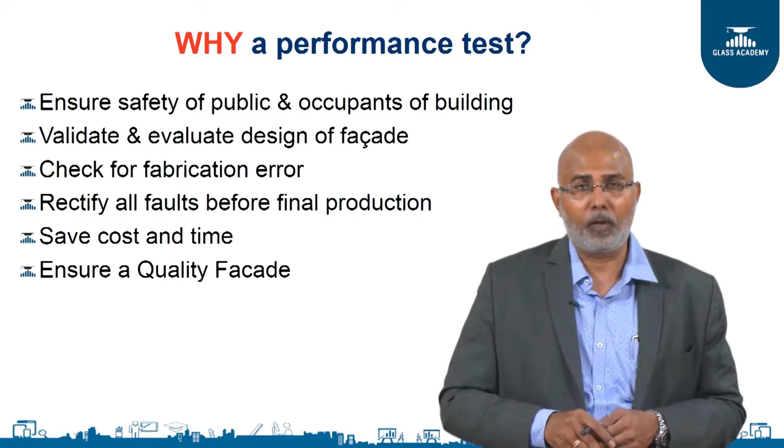By going through all these processes, you save a lot of cost and time. Unnecessarily, you do not have to waste your effort and money on rectifying and repair, because a stitch in time saves nine, and of course, prevention is always better than cure. So, having gone through the tests, made the corrective action and made sure that all the minor errors have been eliminated, you ensure that the product that is finally coming up is a quality facade which everybody is happy about. So, everybody gets value for money.

So, now let us get into the kinds, where do we test and when do we test it? There are two different locations where tests are conducted. One is in the laboratory and one is at the site. The one that is done at the laboratory is before actually any installation starts at the site. So, for the design verification and evaluation, there is a mock-up which is installed at the lab, and then we create atmospheric conditions to understand the behavior of that facade, and based on that make corrective action and retest it and make sure the product is perfect in its design and it delivers what it is supposed to. So, that is done at the laboratory, way before the project actually starts at the site. And the other one is the on-site.

So, once the sample is tested and okay, it is approved, it performs well and it is certified, then everybody signs off and says that you can go ahead and start manufacturing it. So, how do the developer and the architect and the consultant ensure that the same quality that was used for the test is actually being replicated at the site, because it is 1000 times bigger or maybe 500 times bigger than the mock-up sample? So, in order to ensure that the same quality is delivered at the site, there are certain tests which are done at the site on a progressive basis as the project is getting implemented, on a random basis, to ensure that the performance at the site is the same as when it was tested at the lab.

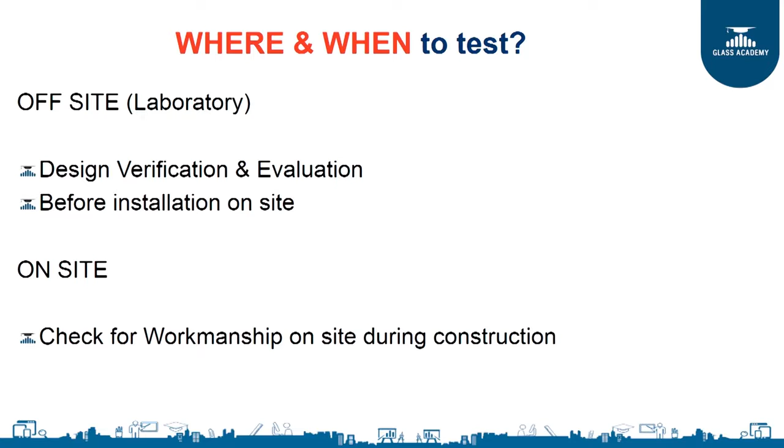Now, what are the tests? Basically, there are three tests. The first one is air leakage, and a facade again is not like a single huge piece of glass. There are 1000 or 5000 glass panels which are coming in a series vertically and horizontally. They are being installed at the site, and there are thousands of joints.

All these joints are getting locked into each other by gaskets. So, obviously you cannot have zero air leakage, but there are certain standards which have been established, and that standard clearly says how much air can leak from that facade. So, we look at different standards for leaking, and then in the mock-up sample we actually try to measure what is the leak through the sample.

So, how do we do that? There is a process and there is a specification for air infiltration and exfiltration. So, the lower the air leakage through the facade, the higher the energy efficiency of that facade is, because considering the fact that we are always having a controlled environment inside the building, we try to maintain a temperature of maybe 22 or 24 degrees, air conditioned or heating up, whichever the case may be, while the outside atmospheric conditions may be much harsher. It can be extremely hot or extremely cold.

So, under these circumstances, if the quantum of air that is leaking through the facade is minimized and kept as low as possible, then the energy efficiency of the building is very high, and you can save a lot of money. Because sometimes we do not realize that we are losing so much energy, because the facade is such a huge area which covers the entire frontage or the sides of the building. There are thousands of joints. So, even a 3% or a 5% leak extra means ₹1,000,000 going down the drain.

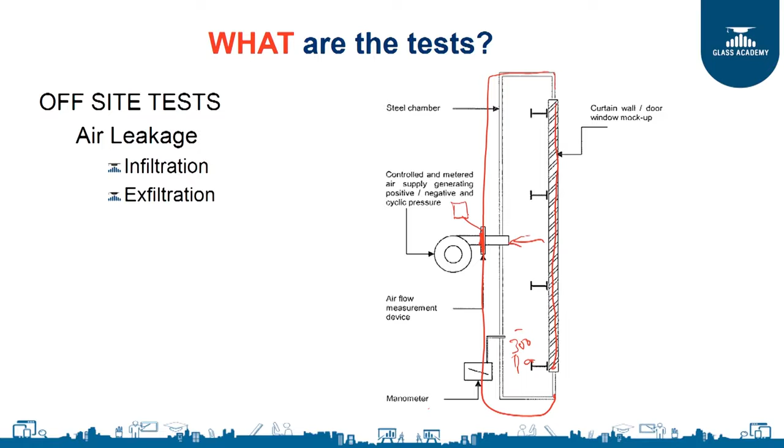And as this air is getting sucked out, we are also measuring the quantum of air which is coming out through an airflow meter. This is the orifice plate over here, and there will be an airflow meter which will actually be measuring the quantum of air that is coming out. So, at a differential pressure of 300 or 500 or whatever is the specification, when we reach that differential pressure, there is a continuous air that is coming out at that constant differential pressure. So, that is the leakage of the chamber, which is a fabricated structure, and the curtain wall or the facade sample which is being mounted over here.

So, now how do we identify how much of this is the chamber and how much of this is the curtain wall? So, what we actually do is we put a plastic sheet before we start the test, and this plastic sheet is an impermeable layer covering the facade. So, when we start sucking the air, this plastic sheet comes and gets stuck to the surface. So, then there is some amount of air which is leaking over here, and this is measured and recorded. That is the actual leak through the chamber.

So, once that is ascertained and recorded, this plastic sheet is removed. Once this plastic sheet is removed, we find that there is an incremental flow of air through this airflow meter. So, the difference between the first reading and the second reading is the actual flow through this facade.

So, there are specifications. For example, ASTM says 0.5 liters per second of air can leak per square meter, which converts itself into 1.8 cubic meters per hour per square meter. So, if you have a facade of 10 square meters, that means 18 cubic meters per hour is allowed as a leakage. And there are of course special allowances, extra allowances given for openables, where the perimeter length of that openable is taken, and then some extra allowable air is provided for as an acceptable tolerance.

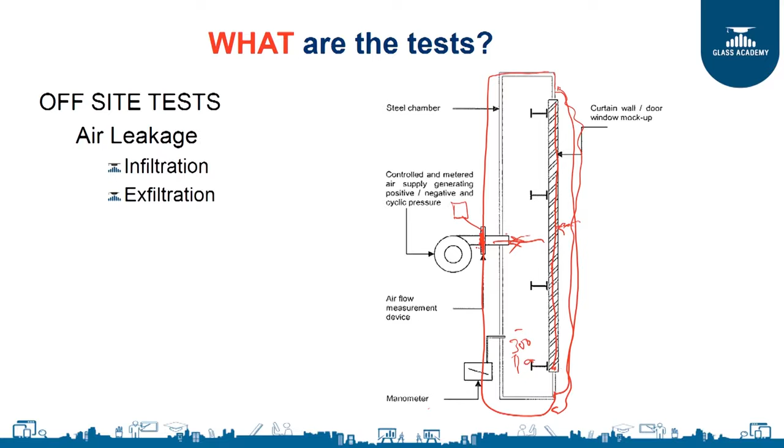The next one is the static water penetration test. Now, one of the things that the facade is supposed to do is to stop the water from coming in when there are extreme cyclonic conditions or a typical monsoon that we are going through.

Now, we have a huge glass facade in the front, and then there are expensive interiors which have been done, and it is either a house or an office. There are false ceilings installed, and then you have a lot of cabling going in these false ceilings, networking cables and electrical cables. So, you cannot afford to have water coming into the building and leaking through that, because there can be a catastrophic accident.

You can have a short circuit, or the false ceiling, being gypsum, will fall down on somebody's head. So, in order to avoid that, we have to ensure that this facade is absolutely watertight, and there is no chance of any water entering into the building.

And if there is water entering through the facade, it is extremely difficult even to identify where the source of the leak is, because generally water tends to go in the path of least resistance. So, it can enter at some level on the 5th floor and come out at the 2nd floor. So, it is very difficult to identify where the water is actually entering into this facade.

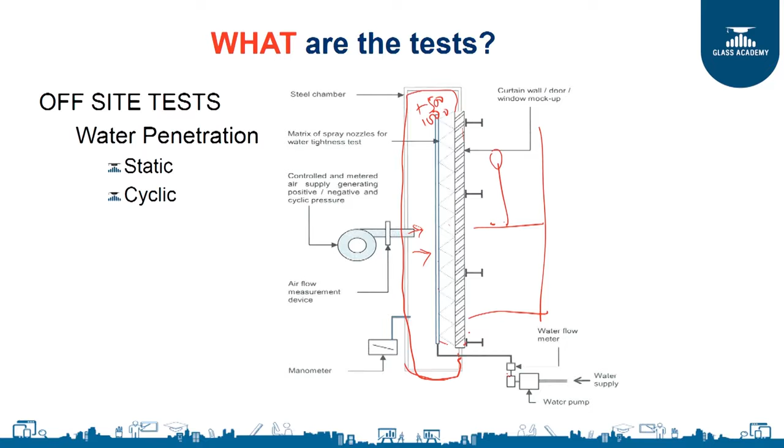So, if the facade passes, that means that in a real life situation it can absolutely not fail, provided the same methodology is followed, the fabrication is done properly and installed properly. The system by itself is very strong, and it will not allow any water to pass through it.

There is the American standard AAMA, where they create a cyclonic pattern. So, in order to create a cyclonic pattern, they add a huge kind of a fan, and for that they recommend a propeller engine, which is one of those older engines we saw used in the Second World War, and these engines are used today widely in all the performance testing labs to create that kind of a cyclonic wind load on the facade.

So, the water is being sprayed from outside, there will be people standing inside and observing at these levels, and you have this propeller engine which is blowing the air, and the water is continuously being sprayed for 15 minutes. The door is open, there is no differential pressure inside, the blower is off, the only pressure is from outside. Normally this is 600 pascals, and for 15 minutes the water is being sprayed and air is being blown. So, here you will have water flowing from downwards into all the other directions.

So, there will be a video which I am attaching immediately after this, which will show how it looks in real life when the test is happening, and you will have a better idea when you see that video. So, this is for a 15-minute period, and after 15 minutes it stops, and there should not be any water leak on the inside.

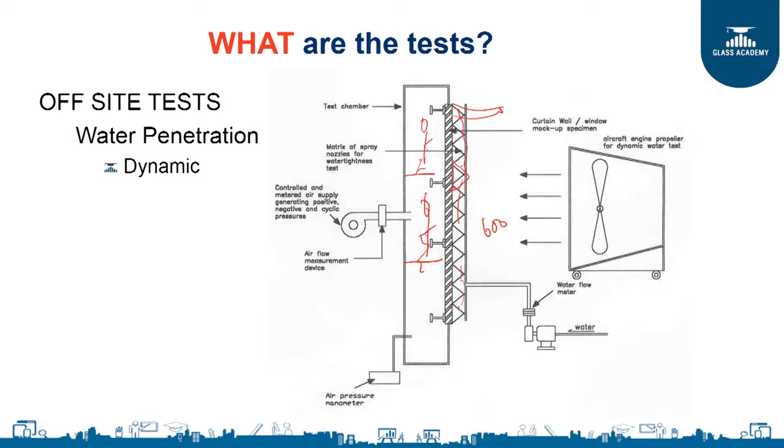The dynamic test also is very ideal for any facade where you have some external features. For example, you will have some pergola made of metal with glass, or sometimes they will use a bullnose aluminum profile to give it a characteristic, some kind of decorative thing sticking on the outside of the building. So, these are all external fixtures, and they want to know whether the hardware being used to hold those things is adequate. So, when you simulate these atmospheric conditions, you can also know whether these are rattling or vibrating, or whether they are able to hold on despite the heavy wind pressure. So, this is the dynamic water penetration test.

So, after that we go to the structural performance test. The structural performance test is to understand and ensure that the structure itself is able to hold, because you have a large panel of glass which gives a lot of resistance to the wind, and when you have a huge facade facing the wind, the impact of the wind on the entire building is pretty heavy, so the stress and the pressure is transferred onto the glass, which in turn is transferred to the aluminum profiles, which are anchored on a floor to floor basis.

So, there are deflections, the entire facade is giving in and coming back, and we need to measure how much it is coming in and out at the given wind load for which it has been designed. There are certain allowable deflections, because aluminum has some flexibility, it can give in and go back to its original position, but beyond a certain pressure it will deform permanently. So, the facade will start becoming concave or convex. That is not good, because structurally it starts to transfer the load into the next profile, there is a sequence of loads getting transferred, and somewhere one of them will give way. So, in order to avoid it, we simulate the wind loads and measure the deflections using transducers.

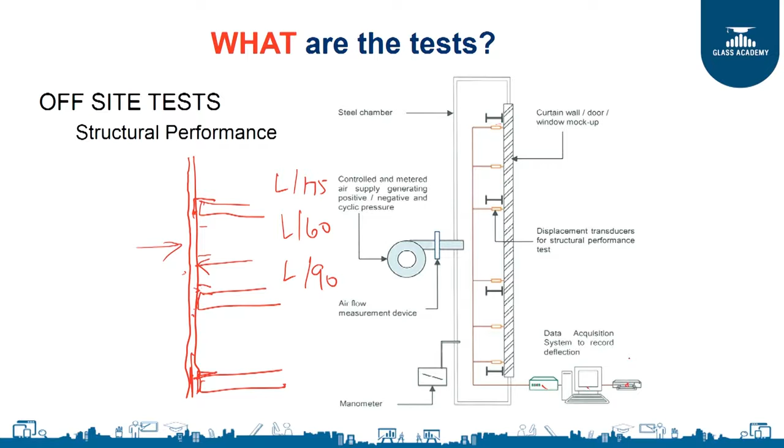So, all the actual movement from the transducers is being collected in a computer, in a data acquisition system, and there is a software which prints it out, and once the printer prints it, we check it with the allowable, and if the actual is less than the allowable, then it is a pass. So, off-site, the structural performance test is what I showed you, and this is a picture which shows the transducers which are mounted.

Now, you may ask, why are there 3 transducers? Actually, when there is a pressure, the deflection is bow shaped like this. So, because it is moving out, the maximum is here, but there is certain amount of movement over here and here. So, we are having a transducer over here, a transducer over here, and a transducer over here. So, let us say this is A, this is B, and this is C.

So, the allowable is the net deflection. So, we have to take A plus B divided by 2, and that figure, let us say, is D. C minus D is equal to net deflection. This net deflection should be less than the allowable, then it is a pass, because sometimes this may be bigger than the allowable, but when you deduct the average from it, the net deflection should be less than the allowable.

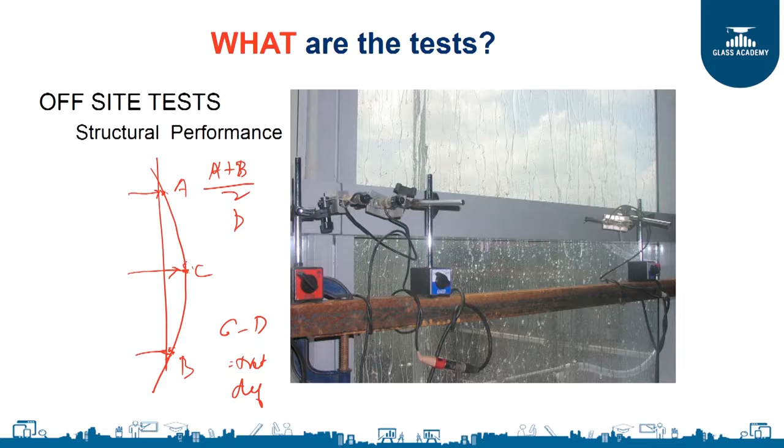The next one is the seismic movements. When you have a high rise building, there is a wind load acting on that building, and the entire building is swaying because of the wind loads, but we are not able to see it because it is very, very small.

But since these curtain walls, like I showed you, are actually outside the slab, not fixed in the roof and the floor, there are brackets outside the slab, and the curtain wall aluminum frame is holding on bolts. So, when the building is swaying, these floor slabs are also moving, and that movement has to be accommodated by the curtain wall. If it is a very rigid system, the glass will shatter.

So, in order to check whether the curtain wall has that ability to move along with the building and accommodate that movement, we do a seismic movement test. This is either sideways, which is a lateral movement, and sometimes you have the vertical live load movement also.

Typically, in modern buildings, in order to reduce the quantum of unproductive area, they cantilever the slab outside the column. So, you have cast slabs which are 1.5 or 2 meters outside the column, and the curtain wall is installed at the end of that 2 meters. And thereafter, when the building gets occupied, all the furnishing, flooring and tiles, everything is added on the cantilever.

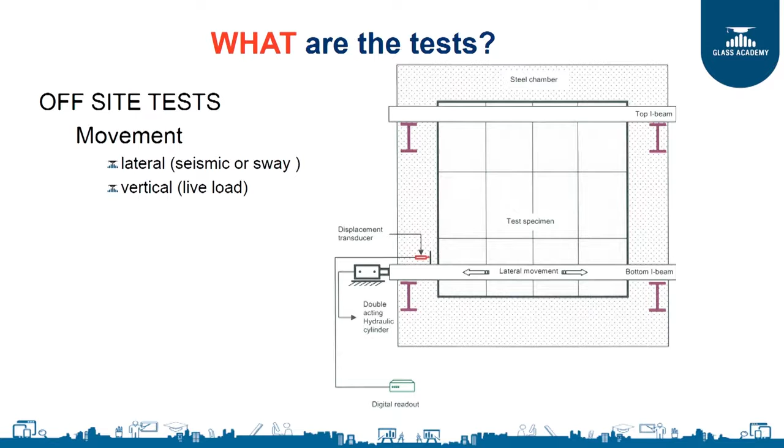So, those put some load on the slab, and the slab tends to buckle a bit, a few mm. So, the curtain wall should be able to accommodate that movement also. We simulate this movement using a hydraulic jack. The movement is normally L by 500, that is the roof to floor height divided by 500.

Left side, come back to 0, right side, come back to 0, that is one cycle. This movement is done 3 times, and the pass fail criteria is just visual observation. There should not be any glass falling off, any aluminum buckling or the hardware giving up. Visually inspected, there should not be any damage to the structure. So, that is the pass fail criteria for the seismic test.